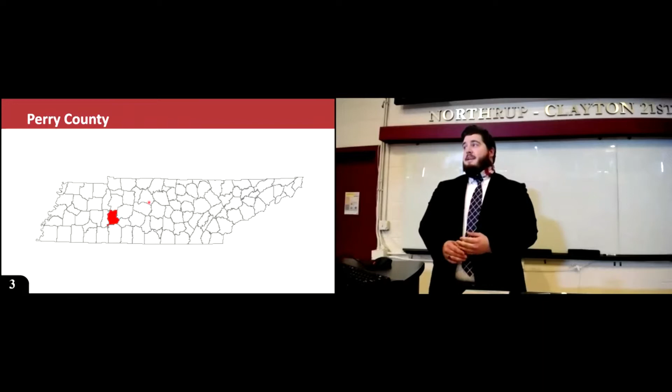Here's a more in-depth view of our project location and the project parameters.

The project consists of a bridge that is 695 feet long with a sufficiency rating of 47.5%, therefore warranting a bridge replacement per TDOT standards because it does not meet the 50% mark.

Here's a view looking downstream from atop the bridge, and here is a view looking upstream also from atop the bridge.

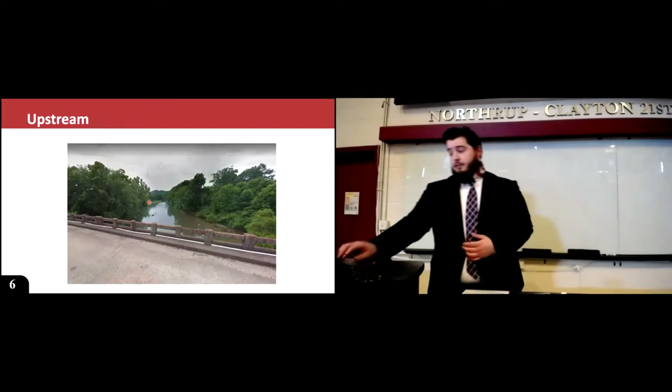I would now like to turn it over to Allison Howe for the first portion of our transportation discipline of this project.

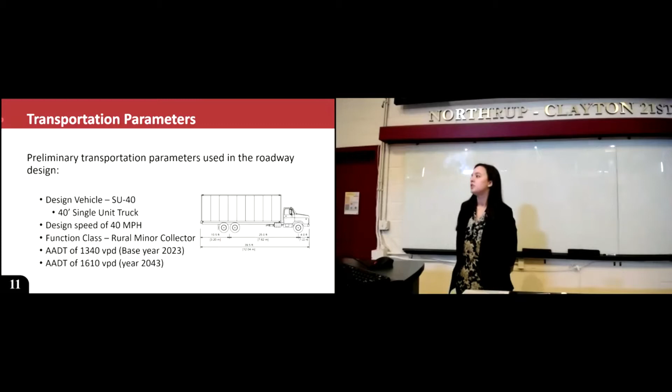For our main road, South Mill Street, our proposed typical section was adapted from RD11 TS2. We decided to use the 2 existing 12-foot lanes, but extended the shoulders to 4 feet.

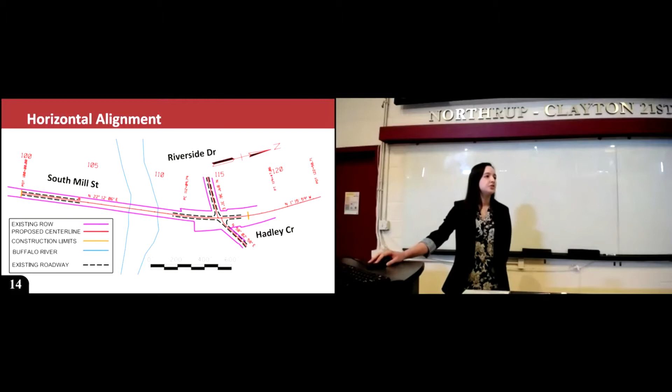Shown here is our horizontal alignment that we have proposed. South Mill Street center line, which is here in red, did not change. However, as I zoom in to the intersection of Riverside Drive and Hadley Circle so you can see it more clearly, Riverside Drive center line did not change as well.

However, Hadley Circle did change. The reason for this was based off of skew angle deficiencies as well as sight triangles, which Nick will discuss in further detail later.

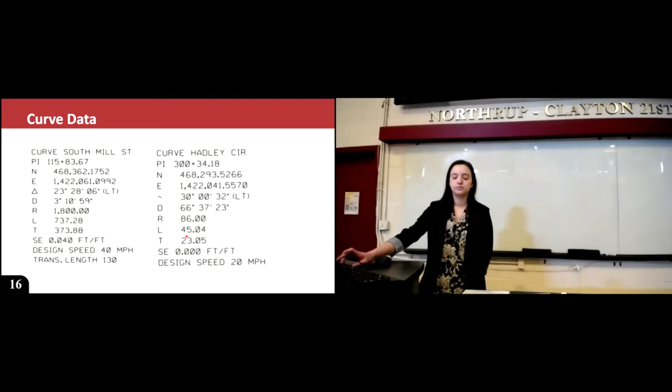Shown here is the corresponding curve data based off of the horizontal alignment as well. I'll now hand it off to Nicholas Lawson to complete the transportation portion of this project.

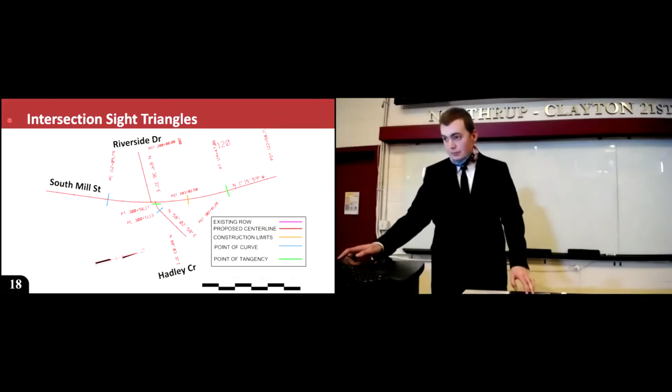Thanks, Allison. I will continue the discussion of the transportation portion of this project. As Allison mentioned earlier, the Hadley Circle was realigned due to sight triangle and skew angle deficiencies.

The existing skew angle for Hadley Circle was 45 degrees. This was far less than the minimum value specified in the AASHTO Green Book of 75 degrees, warranting the realignment. Additionally, a sight triangle analysis had to be performed to determine if the intersection had adequate safety.

Here are the sight triangles that were drawn up. The small orange circles represent the driver's eyes on the roadway. For the minor roads, Riverside Drive and Hadley Circle, these were placed back 18 feet from the edge of traveled way, and they were centered in the lane.

Additionally, using TDOT RD11 SD3, the 2 other orange eyes were placed 390 feet away from the intersection. Of the 4 sight triangles that were analyzed, only one was found to be deficient: the left turn from Riverside Drive onto South Mill Street, represented by this sight triangle line here.

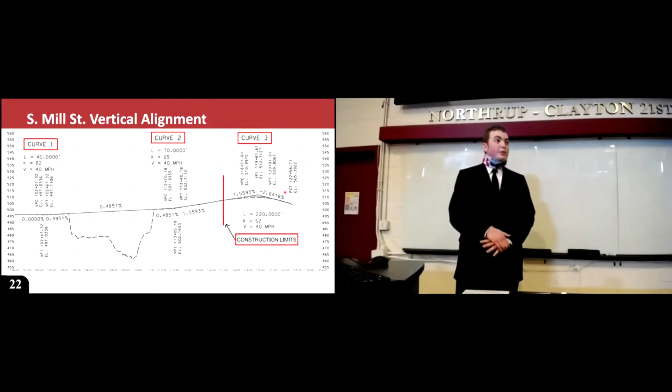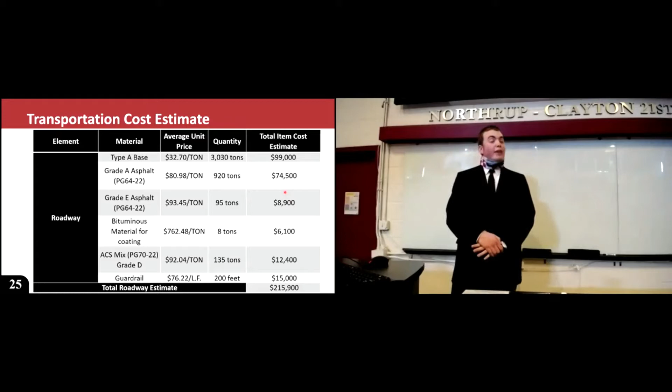This is the first portion of the transportation cost estimate. The average unit prices were determined from the TDOT average unit prices database, and the quantities were determined using the typical sections, as Allison mentioned earlier, multiplied by the length of the roadway, not including the length of the bridge and not including the length beyond the construction limits.

Excavation volumes, again, were determined as previously discussed from the cross sections, but a quantity was also included for the estimated excavation required to clear the sight distance problems. The total transportation cost estimate came in at a little over $300,000.

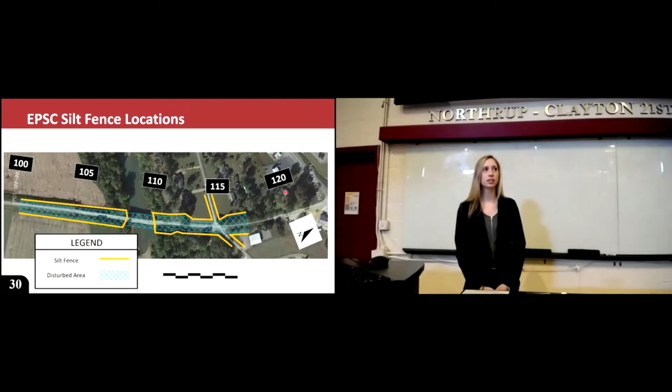I would now like to discuss the best management practices for erosion prevention and sediment control measures. Here's an example of an enhanced silt fence. This fencing will be placed along the perimeter of the disturbed area of our project. We have approximated about 3,500 linear feet of fencing will be needed, which will need to be replaced throughout the duration of our project.

Here's an example of a rock check dam. These rock check dams will be placed within the wet weather conveyances shown in orange. This is used to reduce the velocity of the stormwater runoff from the roads.

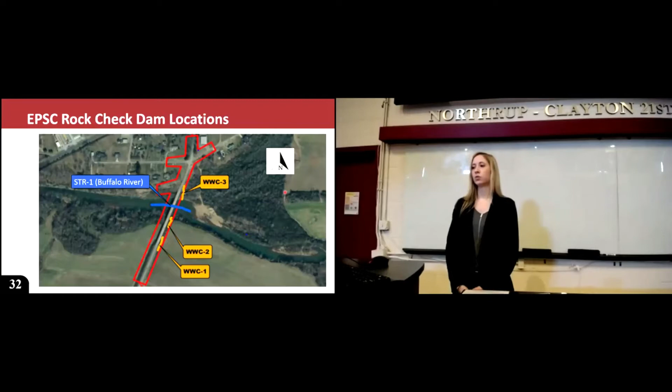Here's an example of a riprap apron. Similarly to the rock check dam, this is also used to reduce the velocity of the stormwater runoff. We have identified one place where this is needed for our project, as shown in yellow on the screen. This is needed because the stormwater runoff discharges straight into a wet weather conveyance, which we need to slow down the velocity of to reduce erosion in this area.

Here's an example of a temporary construction exit. We have identified 4 places where this is needed, 2 north of the bridge and 2 south of the bridge, as shown in yellow.

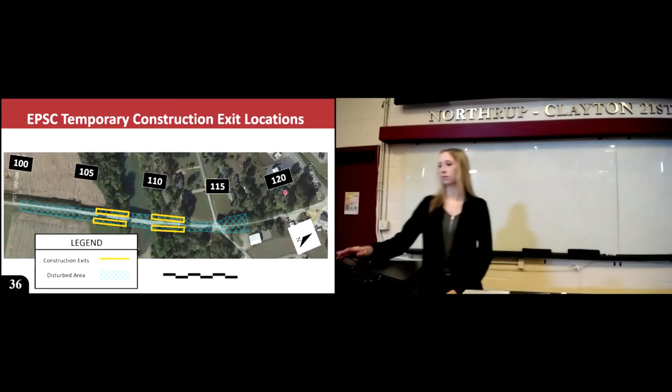There is approximately 3.3 acres of land that will be disturbed throughout the duration of the project, and since this is less than 10 acres, this classifies our project as needing 2 stages for erosion prevention and sediment control. The first is the clearing and grubbing stage, which includes land clearing and initial major grading operations. The second and final stage is the construction stage, which takes place after all the final grading process has been completed.

I would now like to discuss the roadway drainage for our project. All of the drains were analyzed in a program called HY8, which is a culvert hydraulic analysis program. The Q values were obtained for all of the pipes, and I'll discuss how we obtained the values for the flows. The C value was taken from Chapter 4 of the TDOT drainage manual. We came up with the I from the NOAA PFDS server, and the A was calculated in MicroStation to find the acreage discharge to each of the pipes.

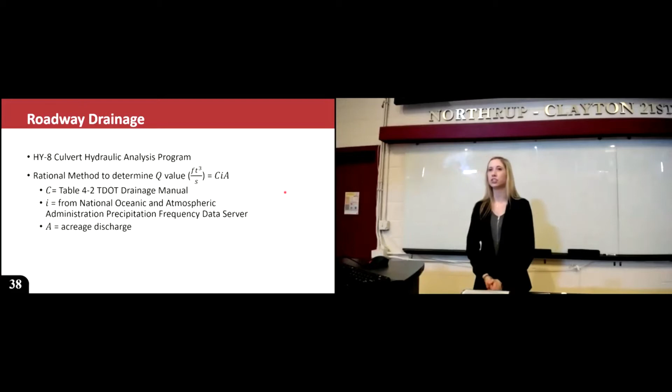Here's a sample calculation of the Q50 and Q100 flows. The Q50 serves as our design flow, and the Q100 serves as our check flow to ensure that the water is not overtopping the pipes or the embankment area. Those values were plugged into the HY8 model to obtain the figure shown on the screen.

The embankment area is shown in brown, though it's kind of hard to see. The culvert barrel is shown in black; this is a 24-inch culvert barrel. The flows are shown in blue and red.

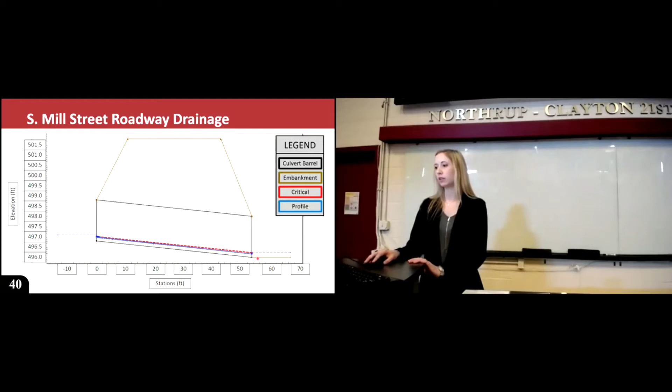All of the existing drains were plugged into the HY8 model, shown in black. We have determined that these are acceptable for the proposed roadway alignment and the proposed bridge design of our project. I will now pass it to Ethan Crabtree, who will be discussing the remainder of the environmental portion of this project.

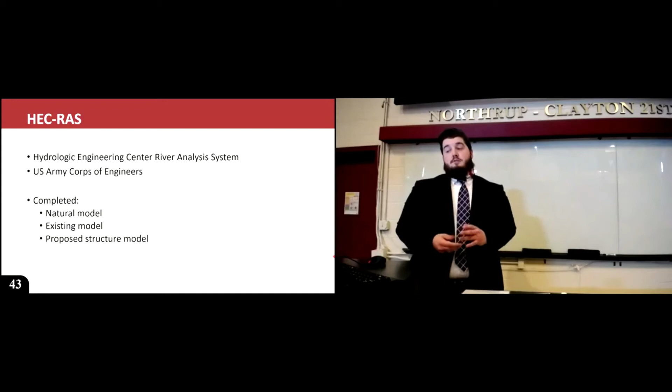To begin using this software, we obtained LiDAR data, which stands for Light Detection and Ranging, from TennesseeGIS.org. This allowed us to see the low-lying lands, the existing structure, and the elevation changes with respect to the land.

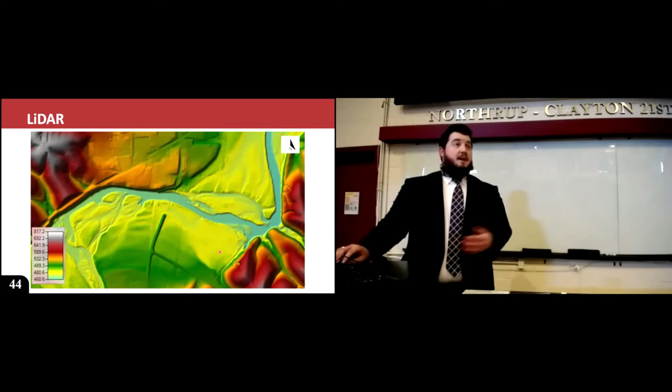I know you probably cannot see this too well, so out of exaggeration I have darkened the cross sections, which are in dark green, with the interpolation values in light green right beside each one. There are a total of 5 interpolation values in between each cross section. There are 6 total cross sections, 3 below the bridge and 3 above the bridge, each spaced 150 feet apart from the previous one. The river is flowing from left to right on the screen.

From that, we were able to get some cross-section data of the natural model. At first, using the land use land cover, we had chosen the Manning's N values to be 0.05, 0.03, and 0.05. Later, we discovered that was not correct, and I will discuss that further on in the presentation. Shown, you can see the water levels for the 50-year, 100-year, and 500-year design flood elevations.

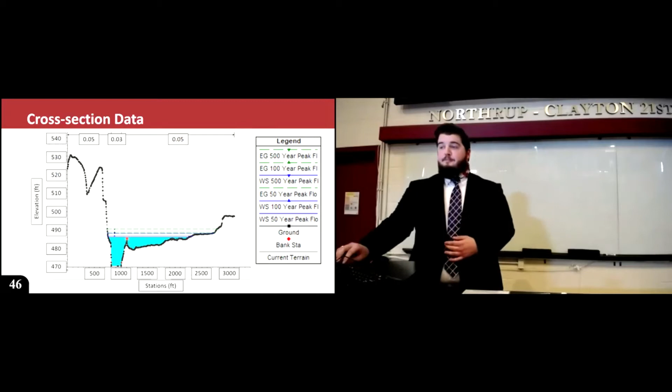Next, using the natural model that was built, we were able to input an existing bridge, the bridge currently in the project. The cross sections are the exact same, and water is still flowing left to right on the screen. Shown here is the specific 100-year design flood elevation, water surface elevation. That came to 488 feet, while the low chord of the bridge was at 491 feet. Therefore, we are not overtopping, or there was not any water being obstructed by the bridge.

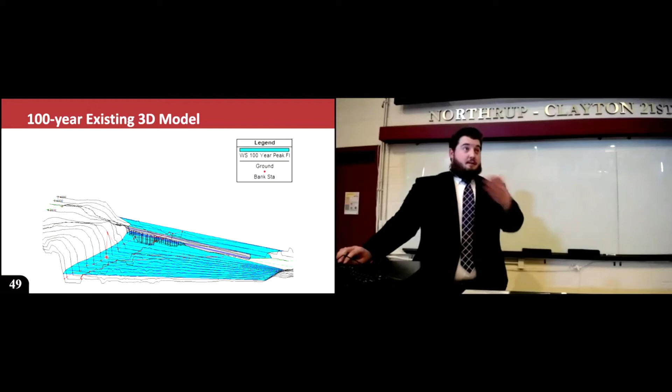As I mentioned before, the Manning's N values were changed due to the land use land cover to 0.1, 0.03, and 0.1. As shown in the figure above, you have the 100-year existing bridge 3D model. You can see here we had messed up with the bank stations, and that was then corrected, and it had been used in the proposed design, which I will show you here soon.

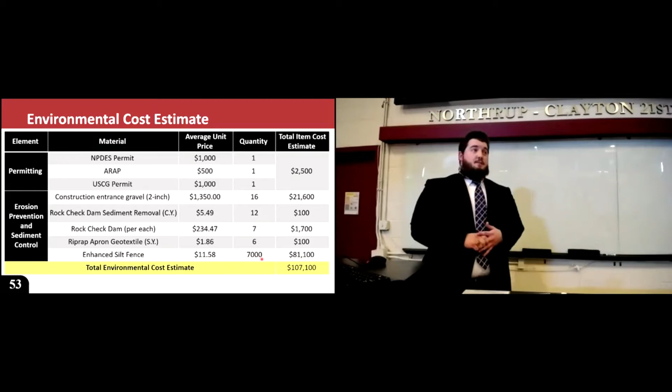Lastly, I would like to discuss the environmental cost estimate. Originally, we had permitting, and we have the 3 permits that Sarah had mentioned. Those totaled up to $2,500. Most of our cost was used in erosion prevention and sediment control. We had used an enhanced silt fence, and we had accounted for doubling it because of replacement during construction. So that is why we have 7,000 linear feet for that, which totaled up to the total environmental cost estimate of $107,100.

I will now pass it on to Kayla Truman for the first portion of our structural discipline in this project.

You may begin. Thanks, Ethan.

I will now begin the structural portion of our project with the proposed stationing and superstructure design, and then Robbie will finish up with the substructure design a little bit later.

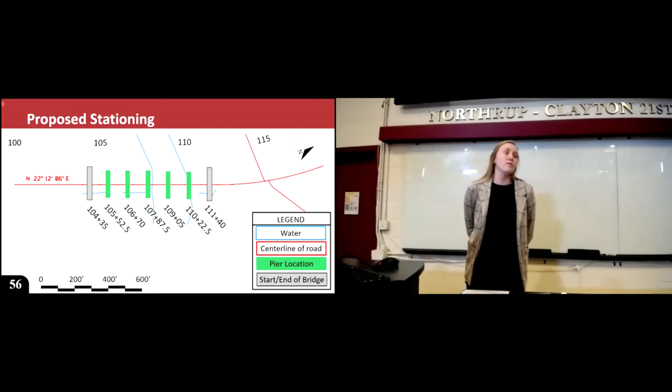Now I'll begin the discussion of the proposed structure. After collaboration with the transportation discipline of this project, we decided on a total bridge length of 705 feet, with 6 equal spans of 117.5 feet. The stationing is displayed on the screen. The gray boxes indicate the start and end of the bridge, and the green boxes indicate the proposed pier locations. The bridge will begin at station 104 plus 35 and will end at station 111 plus 40.

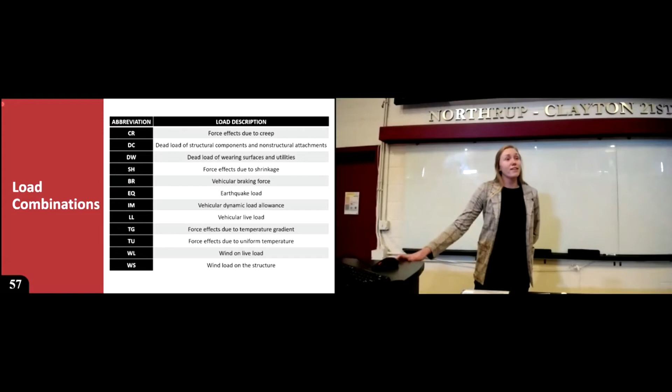Now I will transition into the superstructure design. The majority of our calculations and designs were conducted in LEAP Bridge Concrete and confirmed through hand calculations. Displayed on the screen are the loads that were selected for the design and analysis of the superstructure. Some of these include loads from earthquake, vehicle live loads, and wind loads. Robbie and I are very grateful for this software as it computed over 1,400 load combinations.

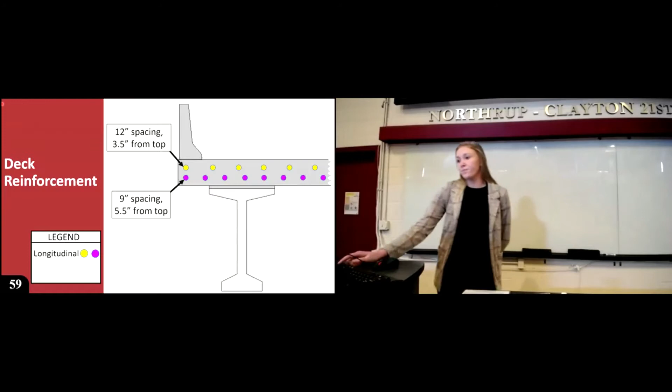Now I will discuss the deck reinforcement. Displayed on the screen is the longitudinal reinforcement. This steel runs the entire length of the bridge. The top row will consist of 12-inch spacing and located 3.5 inches from the top of the deck. The bottom row has a 9-inch spacing and is located 5.5 inches from the top.

As I change to the next screen, the transverse reinforcement will be added to the figure. The transverse reinforcement runs from parapet to parapet, side to side across the lanes. The top and the bottom will both have 8-inch spacings. This reinforcement will be placed on the outer edges of the longitudinal reinforcement to create a mat inside the deck. All of these bars will be US number 6 bars.

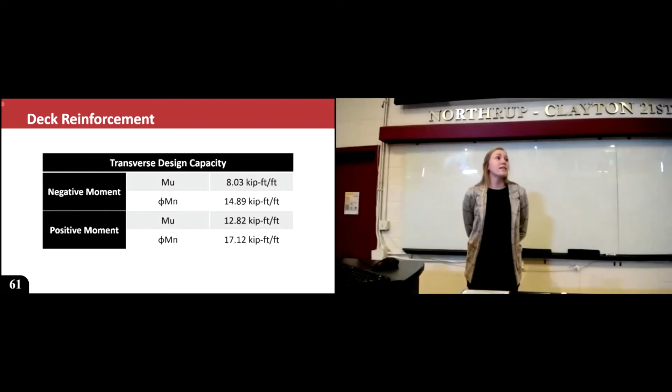The deck will experience both negative and positive moments. The negative moment will be 8.03 kip-feet per foot, and the positive moment will be 12.82 kip-feet per foot. These were generated in LEAP Bridge Concrete and were also confirmed through hand calculations. The capacities exceed the ultimate moment that the deck will experience, therefore indicating an adequate design.

Next, I will discuss the strand pattern for our pre-stressed precast concrete girders. Again, this was generated in LEAP Bridge Concrete and the inputs are displayed on the screen. We decided to use 6/10 low relaxation 7-wire strands. Additionally, we have decided to use a combination of both draped and straight strands.

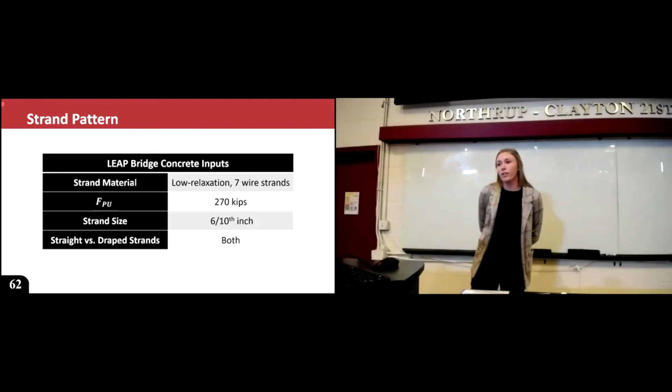The draped strands will be held down by hooks at some point along the beam, and then will rise a set height. Group 1 will rise 54 inches, and Group 2 will rise only 22 inches.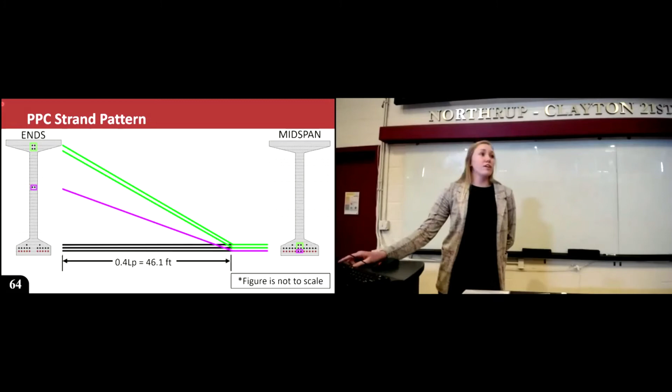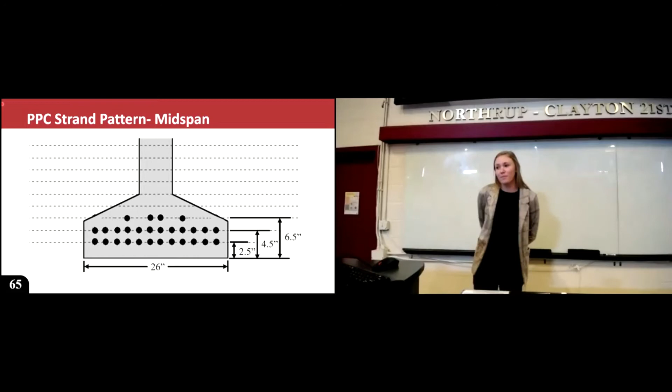Here is a zoomed in picture of the strand pattern at mid-span. The bottom row will consist of 12 strands located 2.5 inches in reference to the bottom of the girder. The middle row will again be made up of 12 strands and will be located 4.5 inches from the bottom. And lastly, the top row will be made up of 4 strands, located 6.5 inches from the bottom of the girder. To conclude the strand pattern design, we will have 22 straight strands, 6 draped strands, with a total strand count of 28.

Additionally, the fabricator will need to know the initial pull value, which is 1,230 kips. This was outputted in LEAP, but again was confirmed through hand calculations. Additionally, with these girders, we must check for deflection, and LEAP outputted a total deflection of positive 0.353 inches. For the positive deflection, that indicates an upward deflection, and we must make sure that there's enough room for this deflection to occur. Our haunch is set at 2 inches, therefore there's enough room for this to occur, indicating an adequate strand pattern design.

This will conclude the discussion of the superstructure, and now I'll pass it off to Ravi to start the substructure design.

You may begin. Thank you, Kayla.

I will now continue the structures portion of this project. I will be taking care of the substructure design as previously mentioned by Kayla. I will be talking to you about the design of the piers, the abutments, and then finally I will conclude with the cost estimate of our project.

So here we have a figure of our pier. At the top we have the pier cap, and at the bottom we have the pier column supporting it. We have decided to go with a design of a single shaft hammerhead design for our piers. The reason we chose a single shaft design instead of a multi-column is because a single shaft provides a larger lateral load capacity for our piers. This larger lateral load capacity will help in unpredictable loads. These unpredictable loads could be floating ice or debris.

For this specific column, we have an 18 foot tall column with a width of 100 inches and a depth of 60 inches.

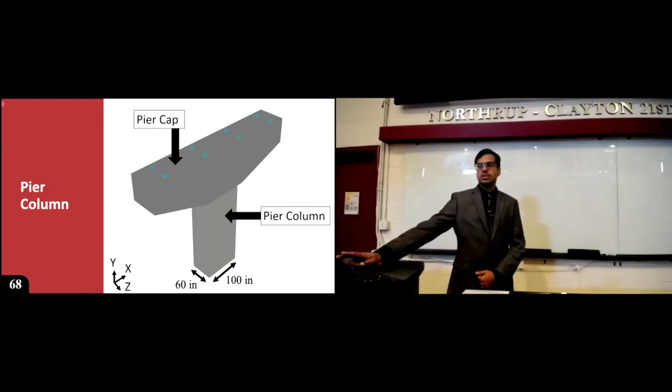As you can see here, these are the parameters that I previously mentioned. Here we have the location of the top of the column and the bottom of the column. For right here, we have the ultimate axial load acting on the column, as well as the ultimate moment in the X direction and Y direction.

Here we have the moment capacity of our column. Taking our moment capacity and dividing by our ultimate moment, we yield a 3.28 ratio for the top of the column and a 2.34 ratio for the bottom. This may seem as an over design, but per AASHTO's requirements, a minimum amount of steel is required for our column. This minimum steel is 67.5 square inches, and what we have provided is 68.64 inches squared.

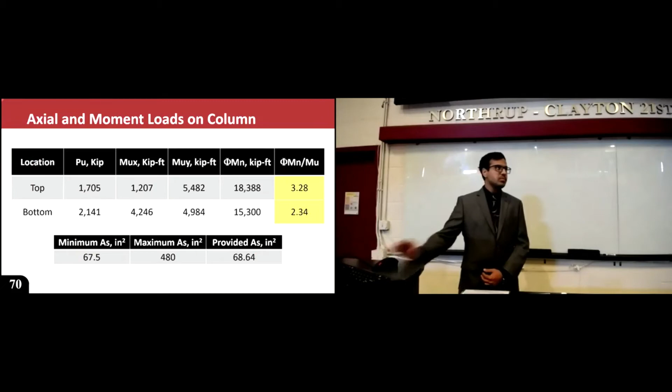This shows that this column is an adequate design.

Here we have the pier cap reinforcement. Here in blue, we have the main bars, and in purple, pink, we have the stirrups. For the top row, we have used 13 number 11 bars. In the second row, we have 7 number 11 bars, as well as the third row, which will also have 7 number 11 bars.

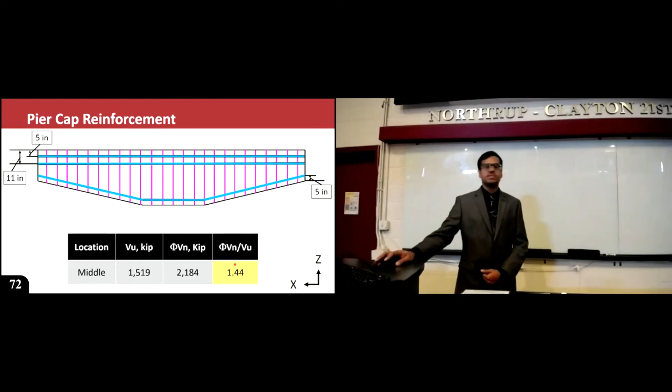For the stirrups, we have decided to use number 6s spaced at 6 inches. In the bottom, we have our capacity for our shear divided by our shear ultimate. This shows that the factor of safety is 1.44. This shows that this pier cap is adequate for design.

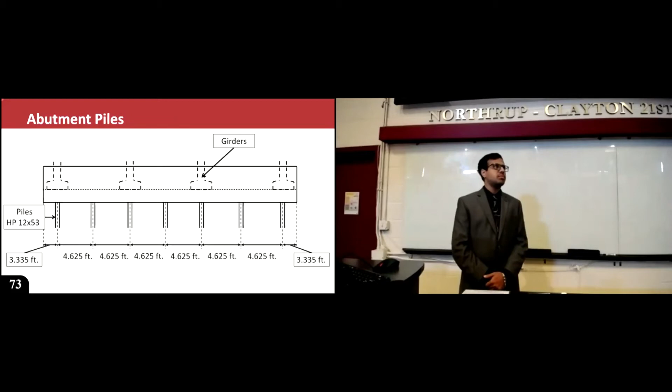Next, I would like to talk to you about the design of our abutments. Here we have the abutment piles. We had to determine the number of piles for our abutment before we could design our reinforcement for the abutment. We have decided to use HP 12 by 53 for our piles.

Using LEAP Bridge Concrete, we were able to determine a total vertical service load acting on our abutment. Assuming that load is evenly distributed among all the piles, we get a total requirement of piles to be 7 piles. The spacing of these piles were determined by placing the pile in line with the exterior girders, and then spacing the rest evenly after that. So then we get a total spacing of our piles to be 4.625 feet.

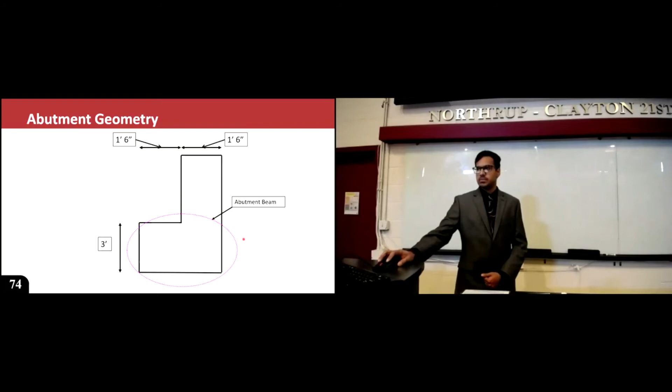Here we have the geometry of our abutment. I would like to note that for the next slide, we will be looking at the abutment beam, which is outlined here in this pink. This is what we will be focusing on for the design of our abutment.

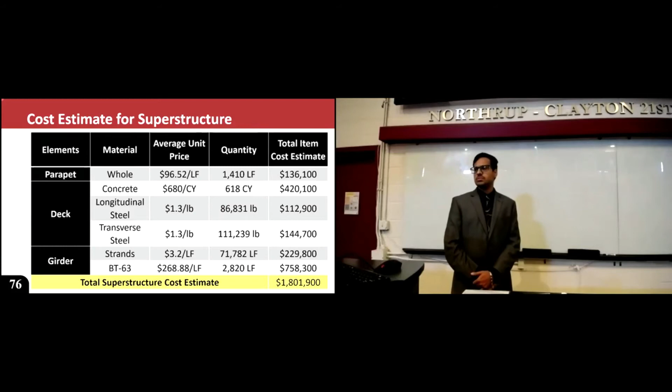Now I'd like to finish it up with the cost estimate for our total project. So here we have the cost estimate for our superstructure. It is broken up into the elements of the superstructure, as well as the material description, the average unit price, as well as the quantity. Here, the total superstructure cost is a little over $1.8 million.

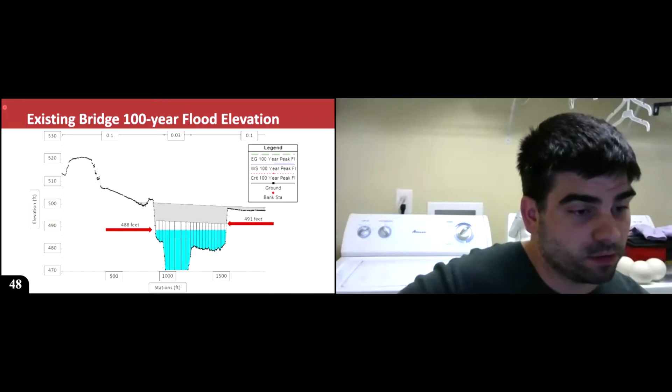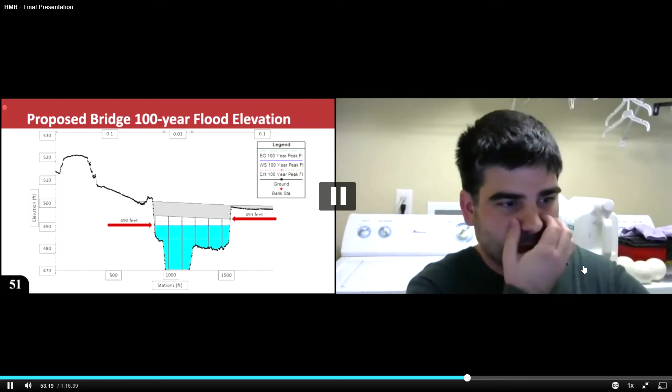On the technical side, did you show a comparison between the water surface elevation between the existing and the proposed model? Do you have a slide number for that? I didn't see it, so I didn't write down the number. You might have had it, but I missed it. There is the existing structure with a water surface elevation of 488, for the 100-year design. And for the proposed bridge, it went up to 490 feet, for the 100-year peak flood. Good deal, sorry I missed that. I guess you could summarize it with a side-by-side comparison. That's probably what I was looking for.

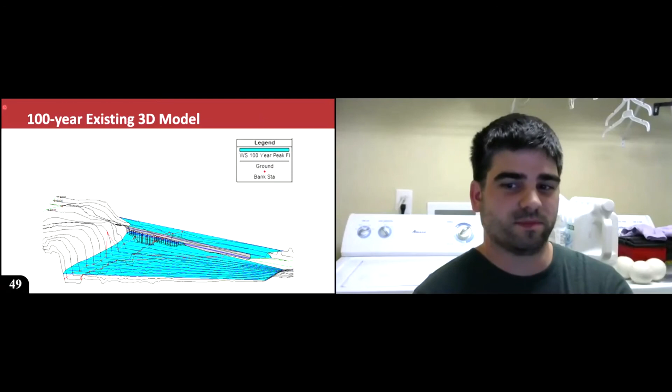It looks like you accounted for the proposed piers and the proposed abutment. At first I was going to ask about slide 49, where you pointed out the issue at the top of bank point, but you corrected that and showed us the correct version on slide 52. I was just going to ask before I saw slide 52, like why not reprint it? But yeah, good job.

What design methods did you use in your model, as far as the energy equation or momentum equation, in HEC-RAS? Not necessarily, can you rephrase that? When you run the model, there are different methods you can pick. If you're not familiar with it, that's fine. I'm not familiar, no sir. Well, I think that's all I have for you, Ethan. Good job.

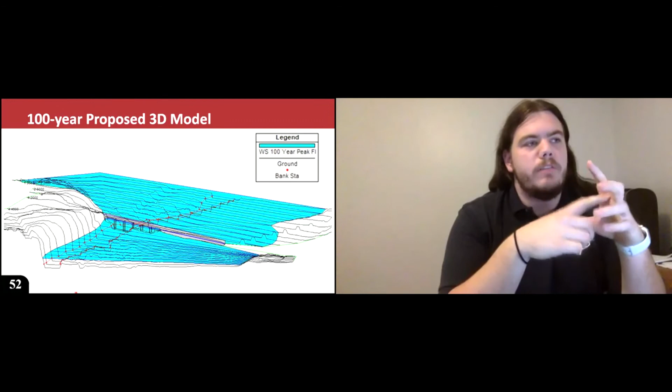I don't have a ton to add either, I think you did a great job. I thought all your images looked really good. I liked that you overlaid them over the standard output that HEC-RAS and HY-8 give you, which made it a little bit more readable. I think that was a good decision. That's all I've got, I think you did a good job.

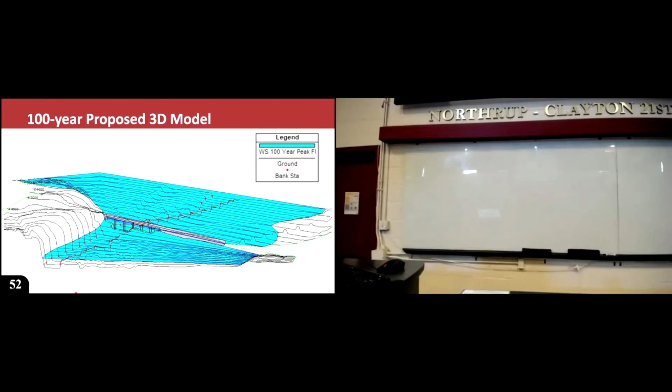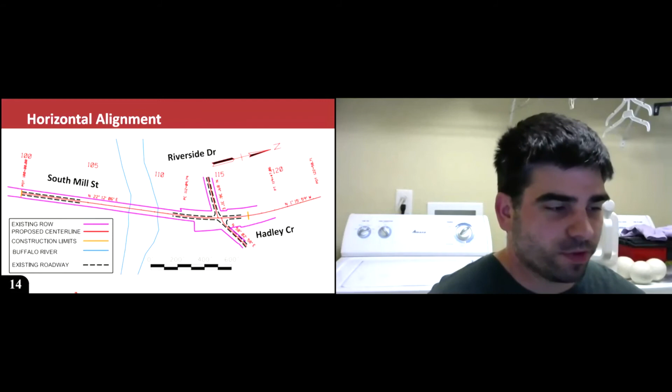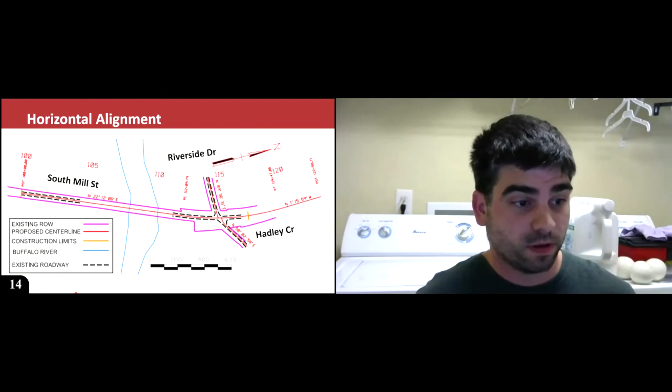And on your intersection slide, where you showed Hadley Circle coming in — was that slide 14 or 15? 14, I guess. It was good showing the legend and the existing roads. One thing would be to add the bridge. On the intersection itself, with the improvements for sight distance, was there an alternative to tie the intersections closer together? Yes, we did look at that, but there's a property in the corner, and to meet the skew angles and sight distances, we found this was the safe alternative.

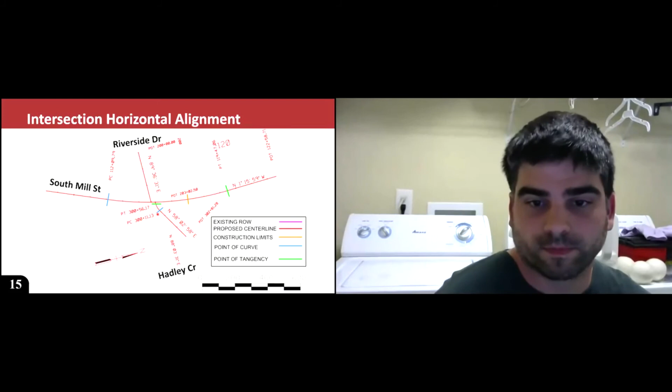And then on your traffic control, it looked like it was one of your first slides, if not the first. Once again, this is a good plan. It's going to work. I'm a little confused by the yellow, but I think it might be my fault.

So we changed the yellow to that color just so it could be seen more clearly for the PowerPoint slides. Okay, I got you.

All right, good job. I guess that's all I've got for now. Thank you. Yeah, I don't have a ton either. I think you did a great job. I think having the typical sections called out specific for this project helps quite a bit. All your figures looked better. I think y'all really improved on that.

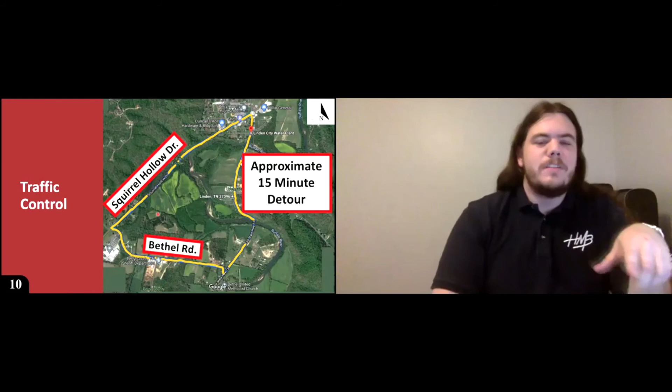My only thing that maybe a little ticky-tacky is the first slide was traffic control, which just didn't, for me. I would like to have some kind of recap of what we're doing on this project instead of jumping straight into traffic control, because that may be something you want toward the end. But other than that, I think you did a great job, and I don't have anything to add other than what John said. Thank you.

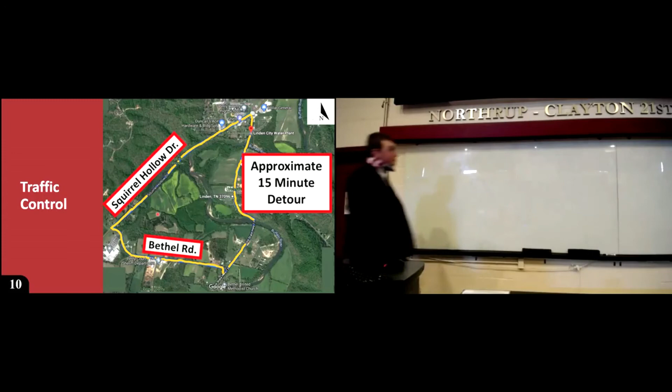Just jumping into it, slide 19. I had a couple comments. Good aerial view. This doesn't appear to be your final design, though. Am I right? Yeah, that was an oversight on my part.

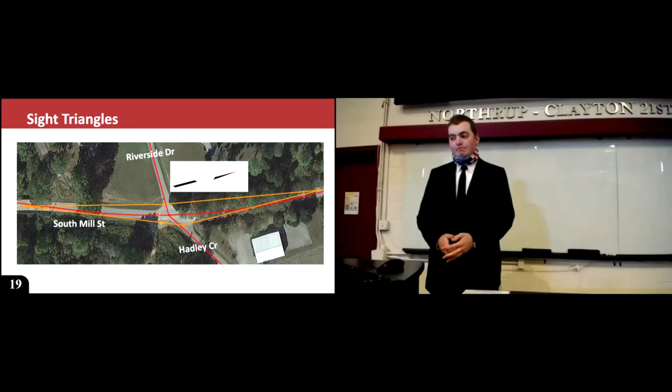We did not include the realignment of Hadley Circle. Okay, because that's a good example of the intersections tying together, like I was saying earlier. But then your proposed is ultimately to curve it in to fix the skew and tie it apart, right? Yeah, okay. So just make sure we're clear on that for future reference, and make sure all the slides are consistent.

Slide 22. So one thing we've been kind of hitting at all along is clearly labeling your begin and end construction limits. And so you've kind of done that for the end, it looks like. If you're able to end there, I guess if you wanted to, you wouldn't have to do any more proposed vertical alignment design beyond that point.

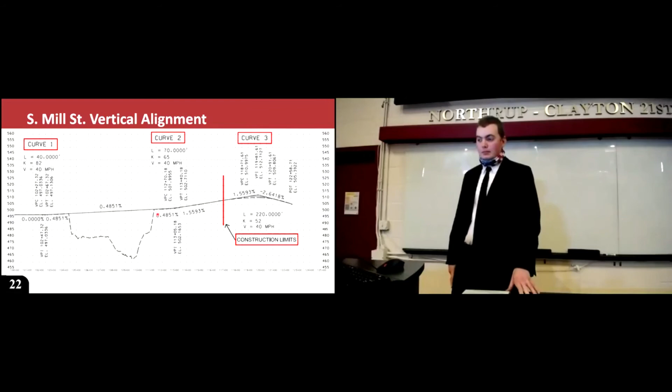Yeah, so we designed the vertical curve there and then determined later on we could set the construction limits. That's kind of how we did it. But okay. And going back to plan view, your sight triangles, all the distance you need to clear and excavate to get your sight distance, you're sure that you're going to be able to end before station 117? Yes. Okay.

And you briefly spoke over the earthwork calculations using the cross sections. What method exactly did you use? I used the average end area method. Okay, good deal.

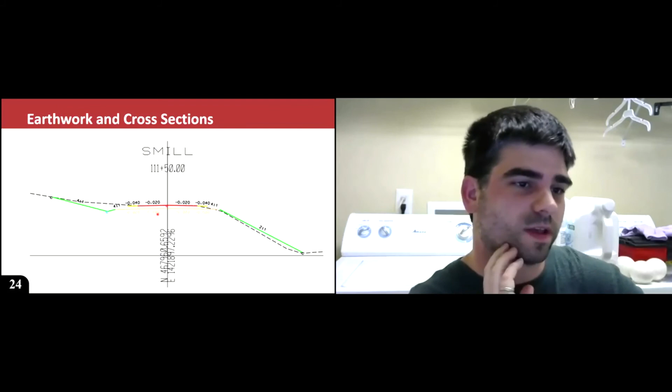And then for your side road cross sections, I didn't see a typical for those. Was that typical the same as South Mill Street? So we did include it, Allison referred to the typicals earlier for side roads and South Mill Street. Okay, I might have missed the slide for the side road typicals. I apologize. Okay, all right, that's all I have.

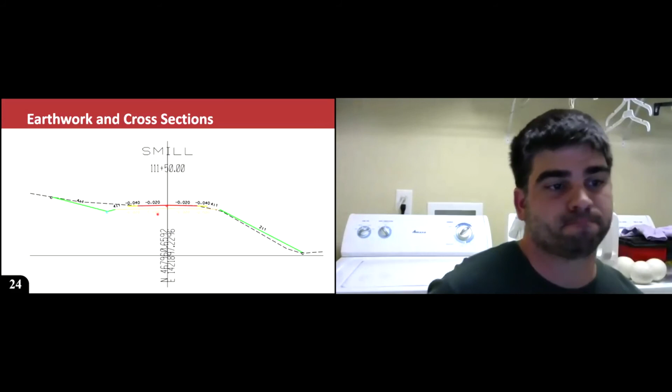Yeah, good job, Nick. I thought your profiles looked better. Like John said, you may want to address the begin and end construction, but all the curve data is there and all the stations and everything is there, so that looks a lot better.

Cross sections look good. Can you go to slide 22 real quick? So you've got your slopes out to four decimal places on there, which in general, we like to have at nice, even numbers. It helps the contractor and everything.

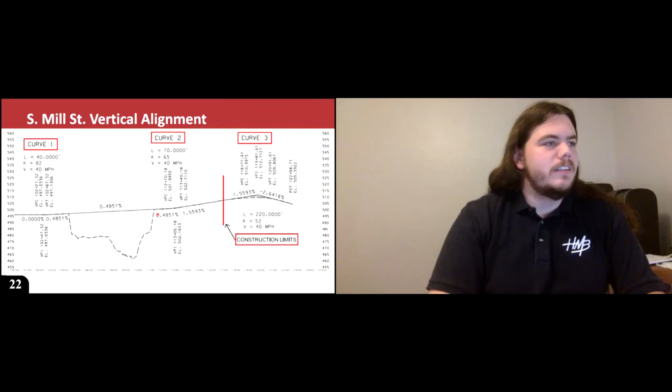That's all I've got as far as technical goes, and I think you did a good job. Okay, thank you.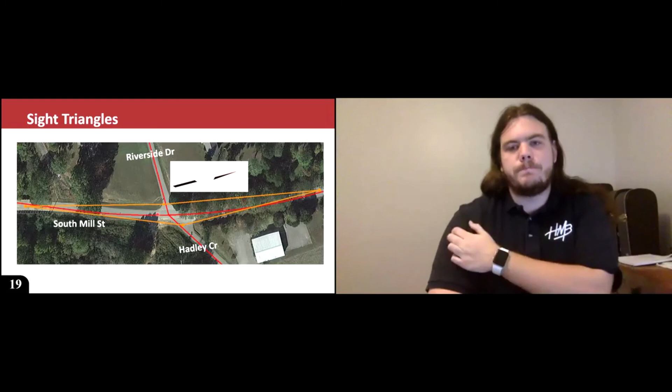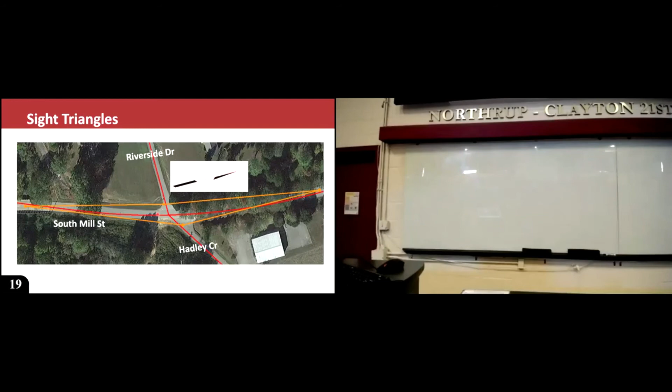First, good job, Sarah. I like seeing the more erosion control devices, and it looks like you picked a lot of ones you'll definitely need. The slides are really good. I did want to ask if you think you might be needing turbidity curtains or anything like that in the river. That's something we hadn't considered, but something that could be looked into.

Okay, and then lastly, can you go to how you calculated your Q values? I had a question about your intensity.

This one? Yeah, that one right there, I guess. So the I value is the 0.29 and the 0.33?

Yes. Okay. How did you come up with that? So we took those values from the Chapter 4 TDOT drainage manual, and then we also referred to them in the NOAA PFDS server, and those values came out identical.

So on the NOAA site, did you look at it relative to intensity, like in inches per hour? Yes. I would just double check that. That seems really low. Your Qs are extremely low. So I think the I value might be off potentially. Okay, that's all I've got.

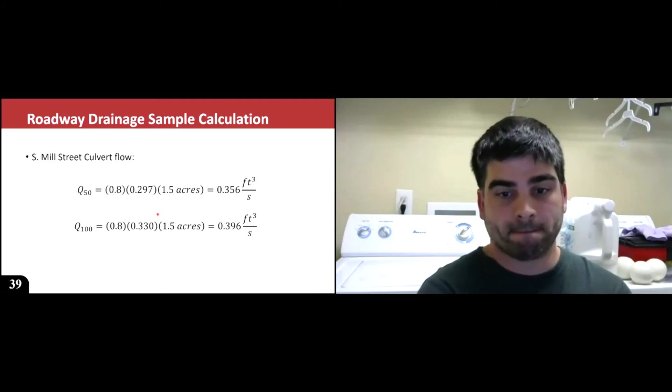Good job. Like I told Ethan, the HY8 model looks really good with the HEC-RAS and everything. I think it looks really nice, a little bit easier to read than what HY8 standardly puts out.

Can you go to slide 28? Back at the beginning, I may have missed it. Did you say the ARAP? Can you say that one more time? You cut out there for a second. Did you say why the ARAP permit was needed, the Aquatic Resource Alteration Permit?

Yes, because our project is classified as a rural minor collector, which is in our scope. We chose this because it specifies it in the verbiage of the permit.

Okay. And then one more, can you go to slide 34 real quick? So you mentioned the riprap aprons, why are those needed? So in this particular location, it's needed because this culvert discharges straight into a wet weather conveyance, and we're just trying to slow down the velocity of the roadway runoff before it discharges into the Buffalo River.

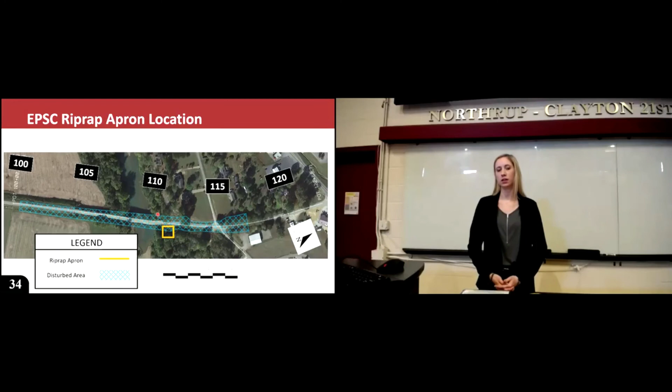What was your velocity coming out of that pipe, if you remember? It seems like with those really low Q values you wouldn't have enough velocity to warrant a riprap apron. Those were our Q values coming out of that particular pipe. Well, you may want to double check what velocity warrants that apron.

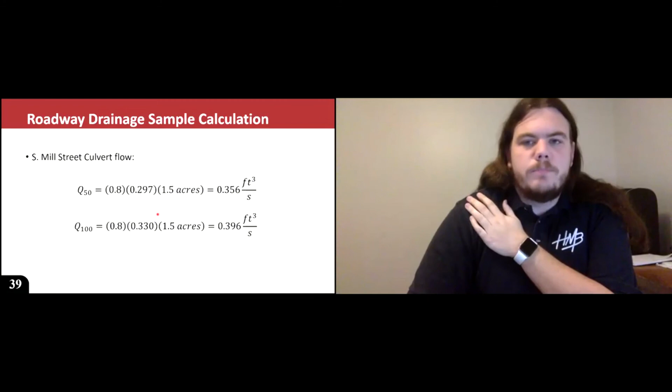But okay, I think you did a great job. Thank you. All right. Already been up, so I'll bring this to Kayla.

All right, Kayla, you did a great job. I thought that all the slides were really impressive, super easy to follow. Unfortunately, I'm not much of a structures guy anymore, so I apologize for not really having any good questions for you at this time, but I thought it was easy to follow. The slides look great. Thank you.

Yeah, so I'm kind of the same way. I think you did a great job. I think all the diagrams looked really nice, very easy to read. I could tell what was going on, even with no bridge experience, so I'm not going to have any technical bridge questions. I don't know if Dr. Huff is hiding in there somewhere, he might have some more. I'm sure he's got some brewing up there. But I don't have anything, I think you did a great job. Okay, thank you.

And that brings us to Robbie. Hey Robbie, good job. Same thing, the slides are really great, easy to follow. I like that you took a step further and went into the abutment design.

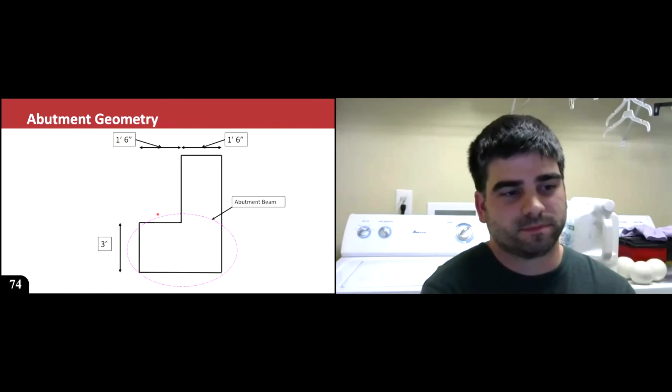Okay, and did you have to assume a rock depth to tie to? Are you talking about like a geotechnical report? Yeah. Yeah, so there were some cavities in the soil, and so we decided to go with a drilled shaft. For the abutments though, we won't have to worry about any cavities.

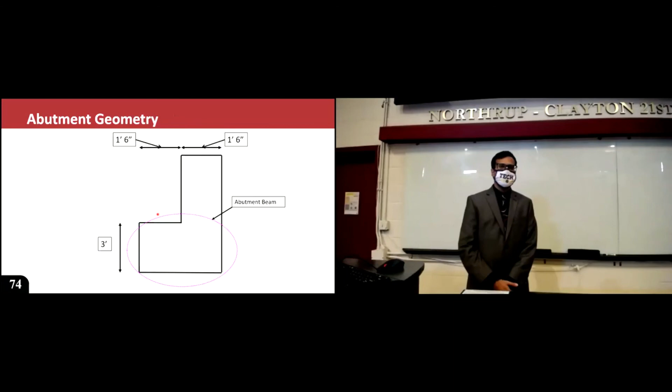Okay, good. No, you did good, the slides were great. Thank you, that's all I've got. Yeah, same here, Robbie, I think you did a great job. Again, slides looked really great, easy to follow, it looked like they were very thorough. I'm not going to have much technical to add to it, but good job. Thank you.

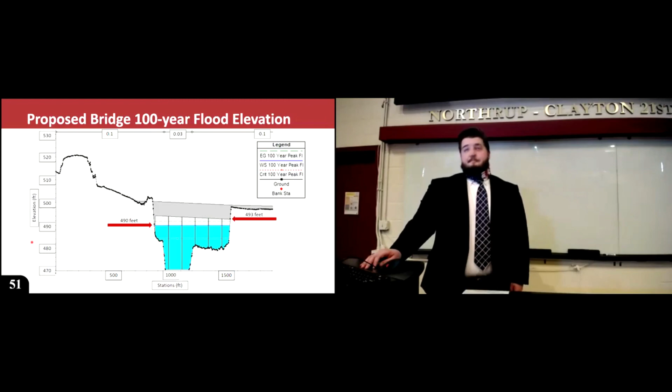Slide 59. Can you explain why you use the larger spacing on the top?

The top mat, yeah, we used 12-inch spacing on the top part, and a different spacing on the bottom. I assume we need a higher moment capacity.

Sorry, I was talking. I got into somebody's Zoom meeting. Can I mute them?

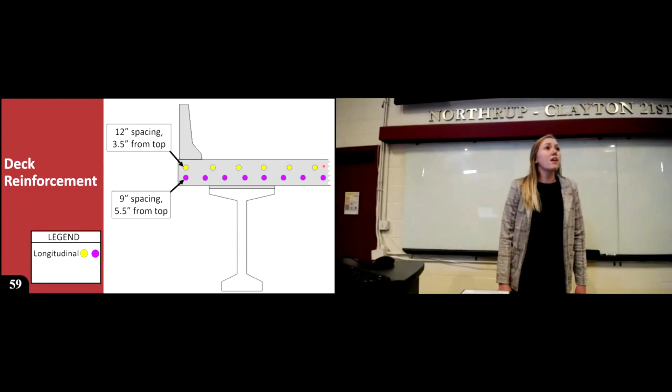And if you get a chance, look at my comments in your final report. Okay, okay.

Maybe one more before we go to Dr... Yes, one more. Robbie, you don't have to, well, you can go up there, you don't have to. It's just about the piles. What was your design criteria for those piles?

Could you elaborate on the question? Sorry. You used 7 piles, and you said you estimated the total load on the abutment, and that required 7 piles. How did you determine 7?

Okay, so we used HP 12x53s. Those were the piles we selected. Taking 25% of that yield and multiplying by the area of those piles, we then took the total vertical service load and divided by that 194, which we got from the area of our piles multiplied by 25% yield. That's how we determined 7 piles were needed.

Perfect, thank you. You guys all did a really good job, a really good job speaking. Very impressive. Dr. Vandenberg, one or two?

Sure. So Dr. Huff stole my pile question, so you already answered that.

One thing, were the piles included in the substructure cost? Yes, yes. Okay, I didn't think I saw a line item, but it might have been buried in there somewhere. Yeah, sorry about that. I'm just going to leave it there.

Okay, alright, so parents in the room, friends and family, questions? The structural team, how do you attach, I guess you're going down to bedrock. You don't have to do soil analysis or anything. You just attach to rock because it's Tennessee, is that right?